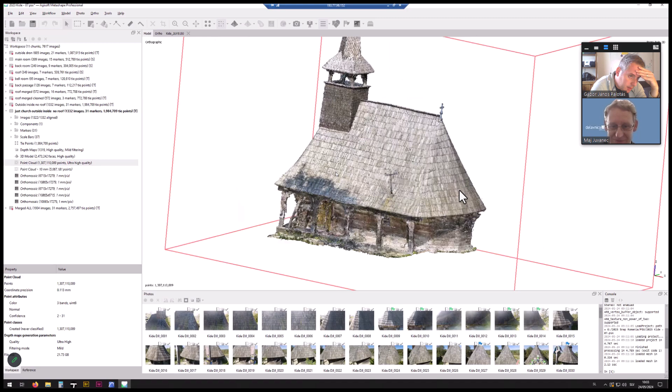Well, we can maybe discuss the survey part, talk about the general things, and then show what we exactly did with this building. So I think it would make sense to show that it's quite understandable from here - you had an outside drone, it's quite straightforward to understand what it is. We have a main room, a back room, a roof, a bell room - these are the chunks, and then some chunks are already merged together.

Let's start with, okay, so first, you upload pictures, in this case like 1000 pictures from the outside. So these are the pictures, you know.

Like I was explaining, I usually take raw pictures because I can then set what is interesting to the photogrammetry. In this case, the roof has to be at the right aperture or the right lighting, the background can be too dark or too light. And here in the bell, you can't see anything inside, but it really doesn't matter because it's too far to be of much use for the photogrammetry.

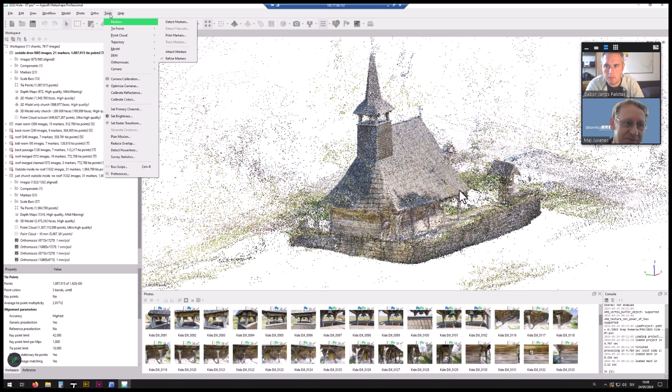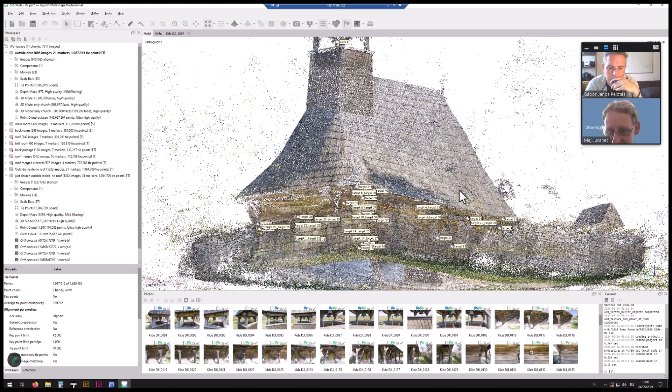So one option is these markers. With detect markers, he calculates and finds these markers on the picture. So if we turn on the markers, the result is he puts the targets - these are these points - on the picture. If we look at the pictures, there are more markers.

What does target mean? Is it the camera target? Like the center line? He recognized this as the target - that's the recognized target, in the middle. So the green ones, here you have the green ones, that means he recognized it and it's visible. These white ones are on the opposite side.

But how do you teach the software to recognize these markers? That's automatic because he knows the shape - this shape tells him the number. That's the number 16. And he puts it in the middle.

Okay, but first you have to give this data to the software, right? Maybe you told this before - sorry, maybe I was lost at the beginning. So the first step is after you have this sparse point cloud, with these tools - markers, detect markers - he does this. He puts these flags on the markers. He recognizes it, and he recognizes it with the number. So before this, it's like that, and the process...

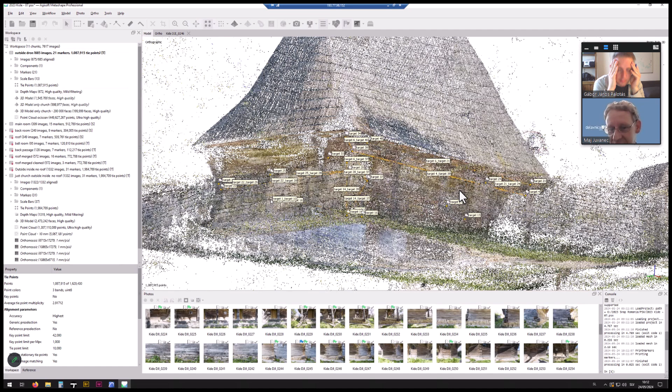Now we have the targets, and when you go back to the sparse point cloud, you have the points, you have the targets on the model. Okay, clear. But you don't have these lines that you see here yet.

This is the calibration process where you put in the hand measures. So there's another thing that was missing there.

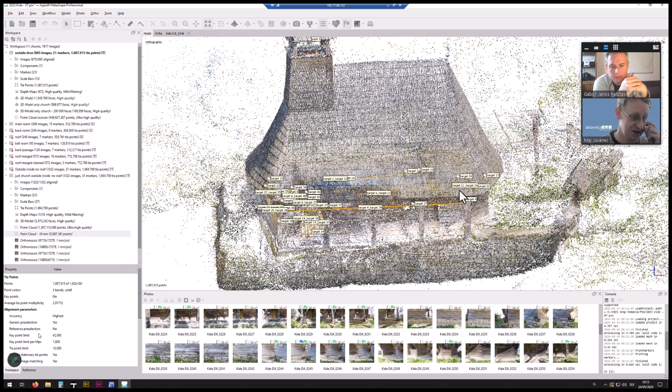This reference - I was telling you, find another button there. So every picture that you have, if it's done with GPS, photo apparatus, or drone, it has coordinates in it. But these coordinates have to be thrown away because they are not accurate enough.

By default, the accuracy in Metashape is set to 10 meters, so that's kind of useful - of course the accuracy in reality is much better. If you don't go with the measurement, actually the results are quite okay. Also, if you have a drone and if it's sunny, you have a lot of satellites visible. Also, non-RTK drone GPS coordinates are relatively okay. But still, for this kind of precision, you have to throw it away.

Because otherwise you cannot manually calibrate the model. So these are the targets that we have.

You see, like 14 is here, the red one. We have the information on how many pictures they are identified in, what's the error in pixels from what he calculated, so how sure he is that the target is on the right spot. If this is a high number, you have to check it manually, why is it off too much. And if it's too much, you just ignore it if you can afford to.

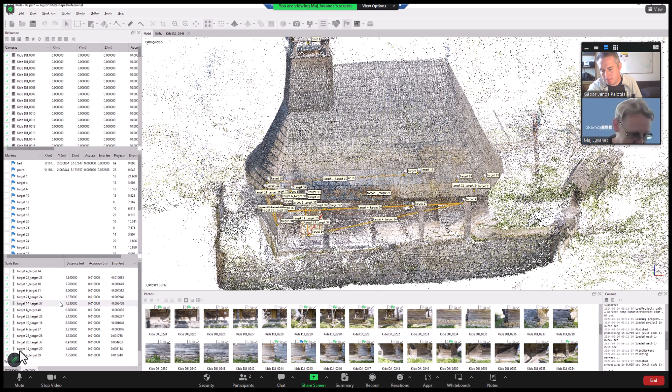So when we have this, we go to calibrate the model. Here is the update transform. At that time, that could actually be interesting to see - he adjusts the size of the building according to the measurement we put in.

So when we put the update here, we actually get these error numbers out. They are not here before, because then he calculates what we input versus what he calculates. And of course, if the number is higher, it means if I mistyped - like if it's actually 7 meters and I put 75 centimeters, which can happen - then I can see there is a huge error, and then you go check what's wrong.

So even if we have a measurement that we failed, or there's somehow an error at survey time, we just discard it. I usually know there was something wrong with the measurement after this. And if you have enough measurements, it's not a problem - if something's wrong with this measurement, let's ignore it, because otherwise it makes a mess.

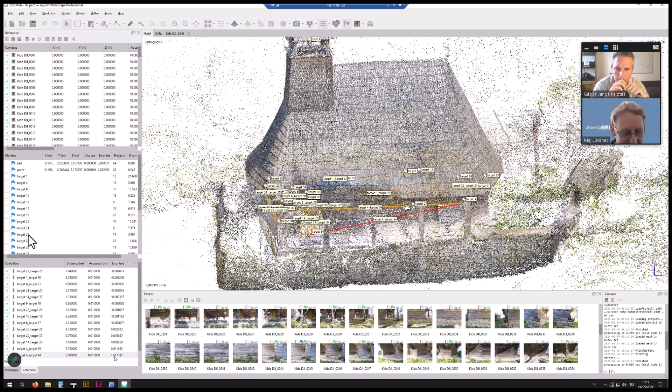I don't know, if you put here like 5 meters - which one did we add, 4 to 36? It's probably wrong at the end, for 1 meter and 6, because we just made it up. But now with the update, I press the update - did you see the picture changed a little bit?

Let's play with it, let's put here some number, I will now add it. Just remind me not to save the model. So we put some different numbers, and now let's take a look at the church, and I'll press the update. It changed the zoom as well.

He slightly distorted the building, calibrated to this number, and that's this calibration, so the model view has a scale. It's not unscaled, but you can see how it changes - yeah, you can see it visually.

So for the first step, when you first put the numbers, it gets a big scaling - so I know it's like 10 meters from here to here, not 10 centimeters. But then when you populate the scale bars, it's just adjusted to relative precision. And of course it's more precise when we have these measurements, unlike on the rooftop where we don't have this control stuff. So you always use this update transform button - there's no other button, just this one.

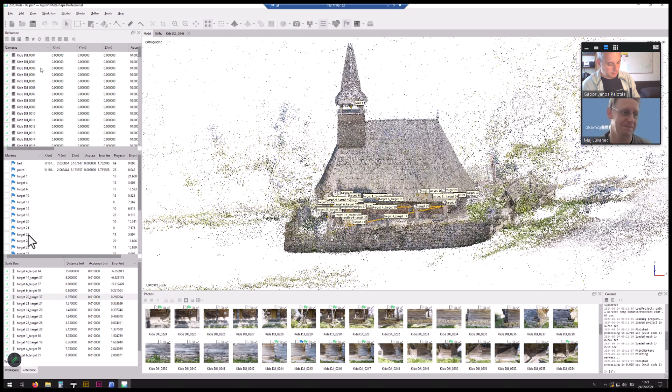When we have this, we move to the dense point cloud, to the next processing in the workflow. So now we've done aligned photos, and we actually calibrated them with the help of the targets.

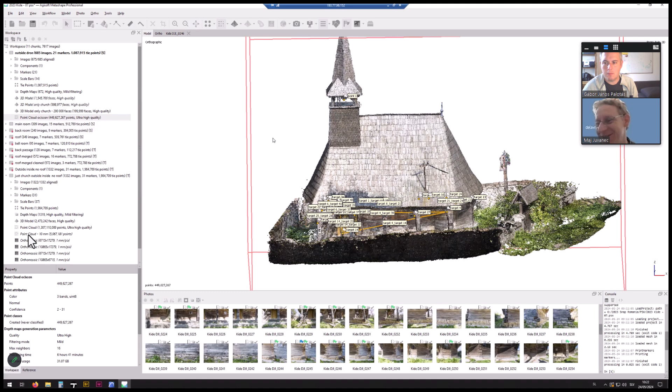Then we go to the point cloud - there is a Slovenian word 'očiščen', that means cleaned up. Then there's a lot of work. You see this point here, it's of course false, it should not be here.

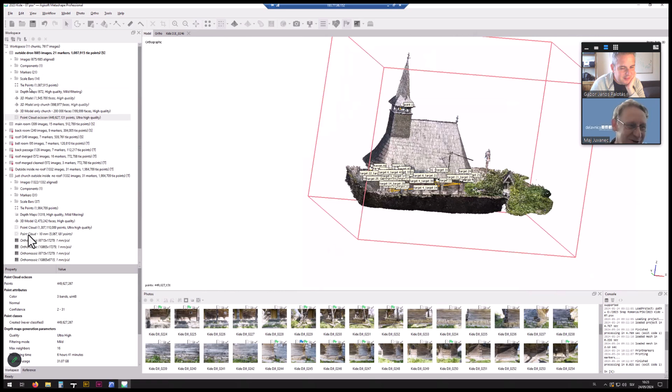It's an error point. So you have to get rid of all these points that are not useful, and as well everything from the surrounding. So if you compare, I threw all these points away in this step.

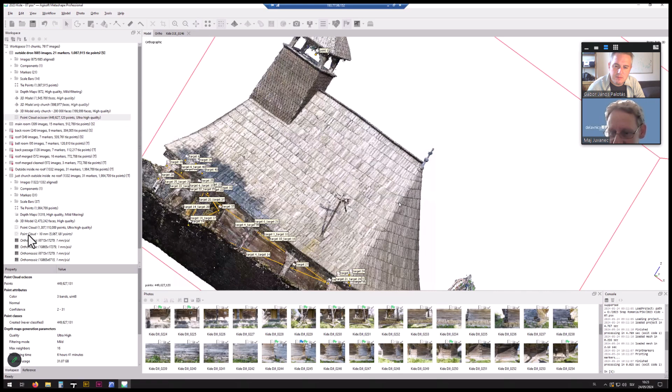Some are simple to do. Then when you go to the details, you can do this time and time again, and you can always find a point that's flying, nothing to do here. Some are simple to identify, but then when you get to more, it's harder to work with some other details. Then of course you can just work with some section, and how precise you are in this step, it takes a little to a lot of time.

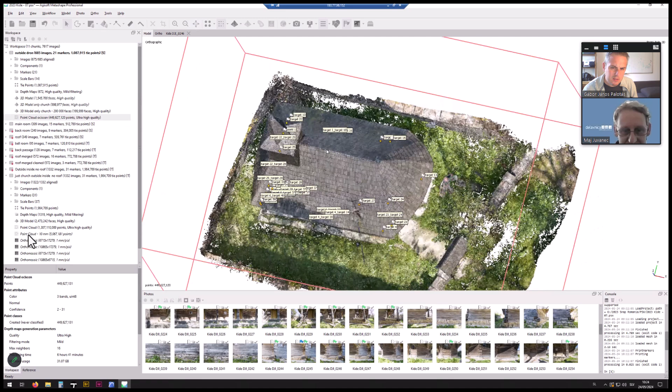So this is the dense point cloud, right? Yeah, already the dense point cloud. Because from now on we usually work from the dense point cloud, so it doesn't make much sense to clean up and work a lot with the sparse point cloud. We work here to get the geometry right, but most of this noise can stay here.

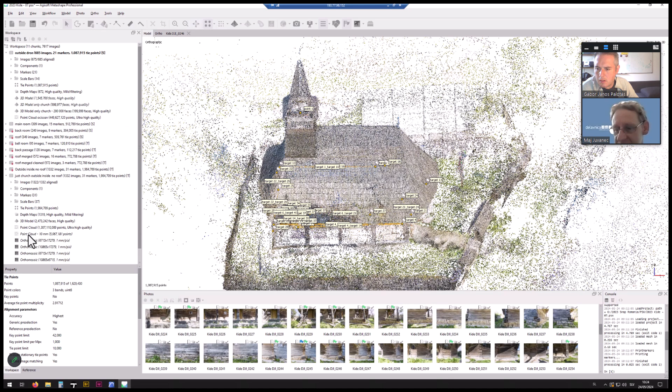Another thing - I said at the beginning let's do this with as much information as we can. When we calculate, there's an option we always put on that says calculate confidence. So this confidence is the software calculating how sure it is that some point is at the right location.

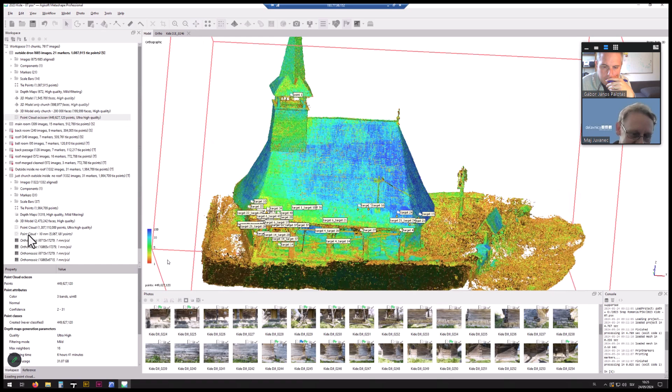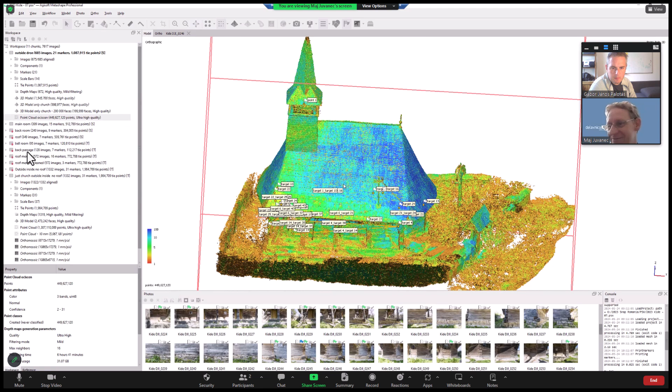So here we have the scale bar. 1 is less confident, 100 is almost completely sure that this is the correct location. And of course, this depends on how many pictures some point can be seen in. So the roof is relatively simple, and it's quite sure that the roof is there. You see there are no more red points here because I have cleaned up - I actually threw the bad points away.

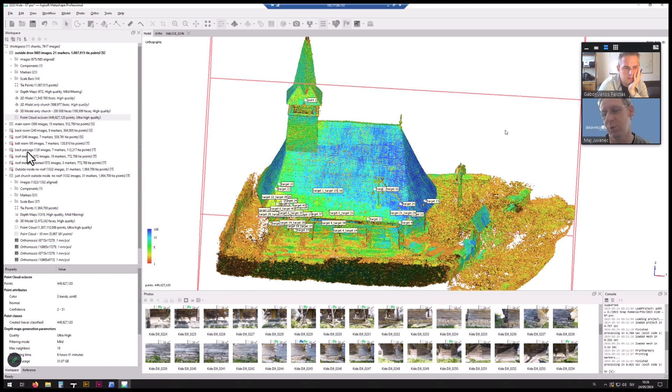So not at the beginning, but rather at this step. Here we start cleaning, but not throwing away every second point - because anyhow, you see there's a lot of points, too many points for working afterwards. But we are throwing them away the smart way, so the points that have lower accuracy are thrown away.

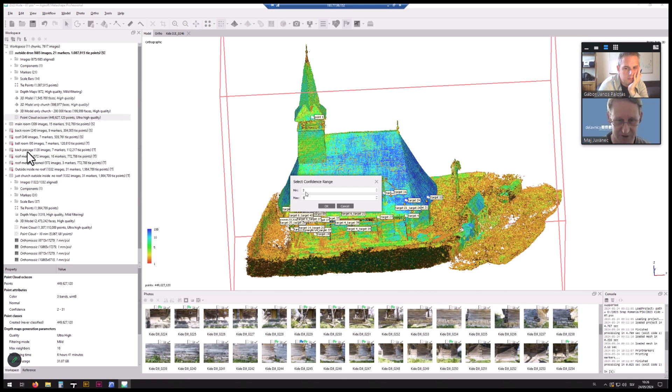And of course, I can select, filter by confidence. I've thrown number one away, so we can see the really bad ones - the next, between 2 and 5 error, we'll see. So these are the points that the computer is less sure are really good.

So if you have a lot of points, we can decide, okay, let's throw all these points away. It always takes some time to calculate how many points are selected, I don't know why is that. So at some point now we have 500 millions - he will update and we'll see how many points we have selected, and we'll throw them away.

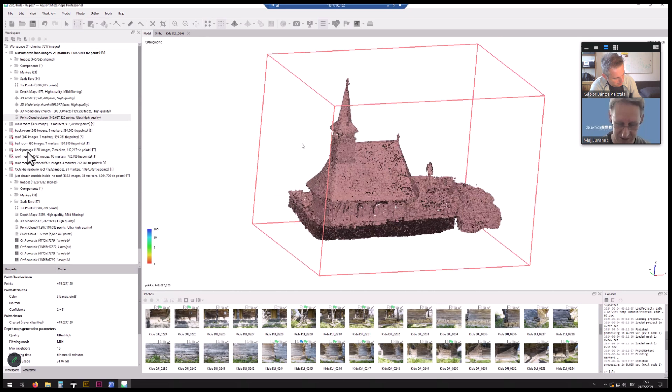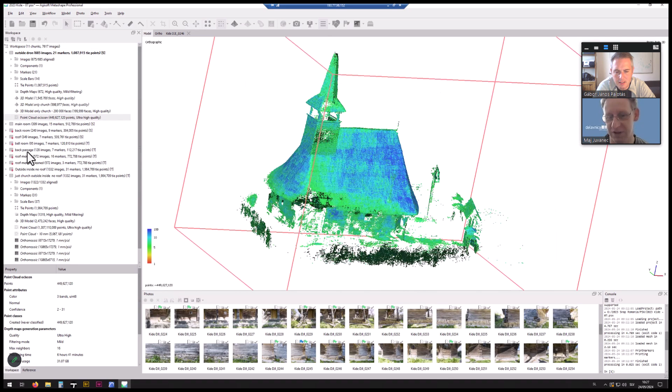I have thrown too much points away now. I usually just throw the level 1 away. You see, I've thrown too much points away. These are now only the ones that are relatively quite sure. But of course, now you see the roof is okay because we have good lighting and a lot of pictures overlapping. We have fewer pictures from the bottom side.

We still don't know how many points it's asking to calculate. Of course we can see the elevation here, that's just the color, what's up and what's down.

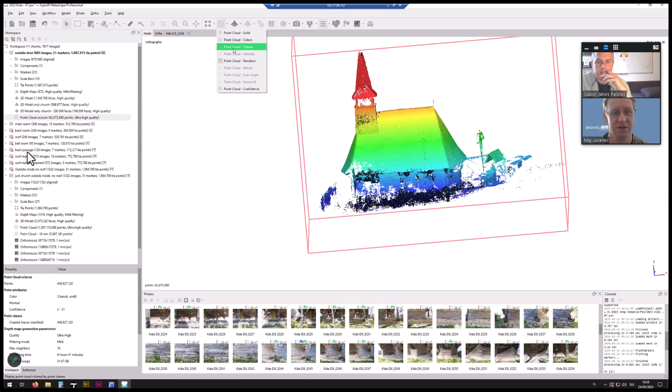Doesn't really matter. What we could do, but usually don't need to, is classes. So up to some point he can classify this automatically, so he knows what is greenery, what are big trees, what are small trees, what electrical poles are. He can separate some stuff, which is then easier to work with.

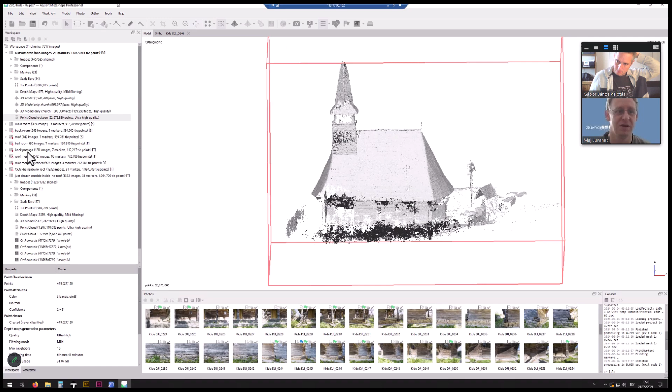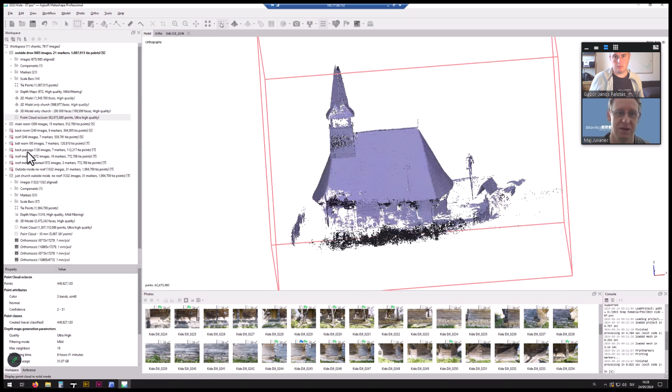But again, it's not that important for what we do. We could classify it to set, okay, all these points will be called 'the bell,' and then we can work with it, turn it off or on however. But I'm just showing you it's not that useful for what we are doing. That is more or less that.

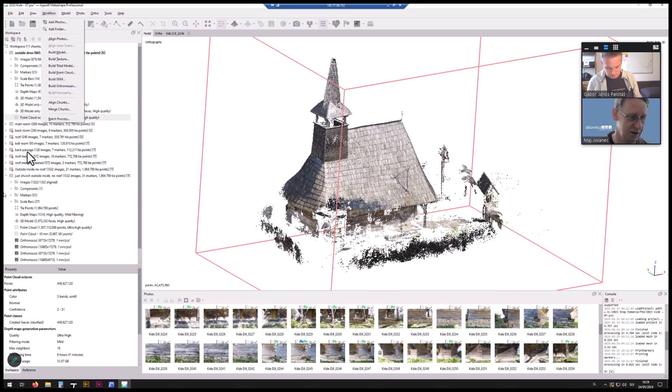But from now on we can go to the next step. We can build orthomosaics. These are the pictures we'll go at.

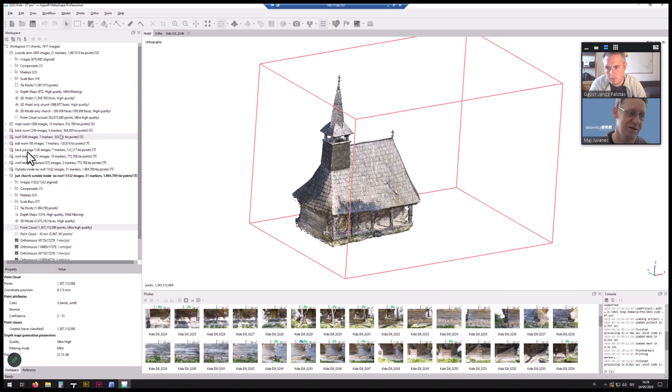Okay, I have now switched to the chunks that are already joined. We work this for every chunk, for every chunk separate, all these steps have to be done. Let's go, before we go there let's see the chunks, so we'll kind of disable everything.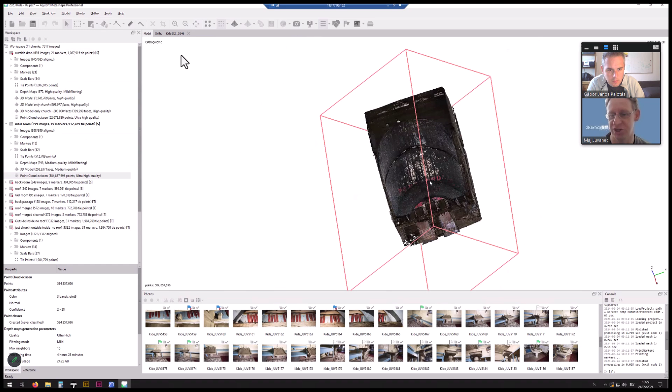Okay, let's see the main room, so that's one chunk, the main room. Then we have the next chunk, let's say the back room. We have 10 more minutes before... okay, then we just reconnect.

Okay, you see this button here at the right, this one shows all chunks that are aligned, and these two chunks are already aligned. So the back room fits perfectly where it should be. Let's disable this one, it will be easier to see here.

And if we put on the targets again and the measurements, you know target 38, target 3, and target 19 are as well, or probably this one - these are the three targets that are the same on this chunk and on the chunk of the main room.

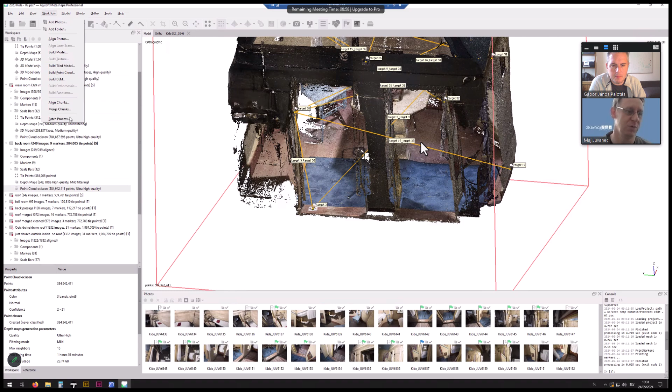So when you go to workflow, align chunks, you select, okay, now we have the main room and the back room, please align them, and you just mark it, okay, based on that point base. It will calculate and it takes a lot of time, it's not that good. So marker base means he will just add it together - if you have 3 points non-planar, he can add it together.

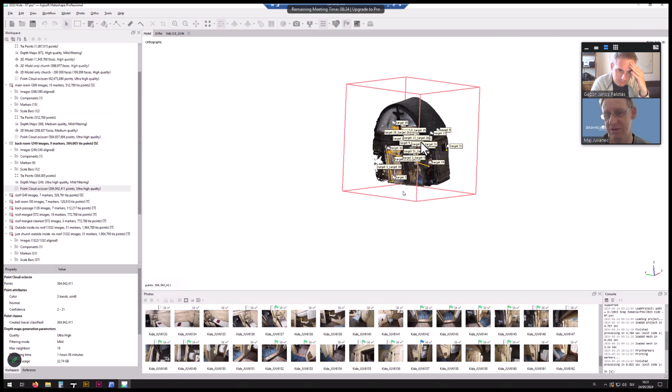And so all the chunks are now aligned in this way. So now you just... no sorry, the chunk and the outside drone as well. But we've kind of erased a lot of data from the outside chunk. I assume if you align them in a good way, it doesn't make too much sense to merge the chunks, right? Because you always have the option to switch off some parts and use some of them only.

You are right, however the only difference is - I don't know why - if we try to manipulate, like to make a cross section, he just selected the active chunk. I cannot make a section of a building if I have more chunks because he doesn't know how to do it. So when you merge chunks, you keep the originals as well.

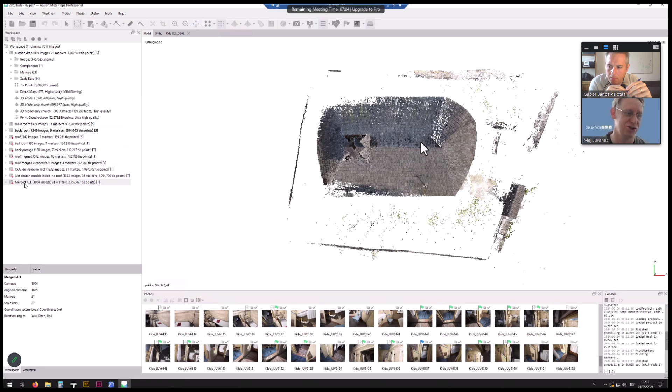Yeah, I keep the originals, and then you have like roof merged and roof merged cleaned. I usually add it, so this chunk has everything merged, and then we have just outside and no roof, because I don't know, the roof is not that good or that interesting here. So we are talking about the attic, not the roof.

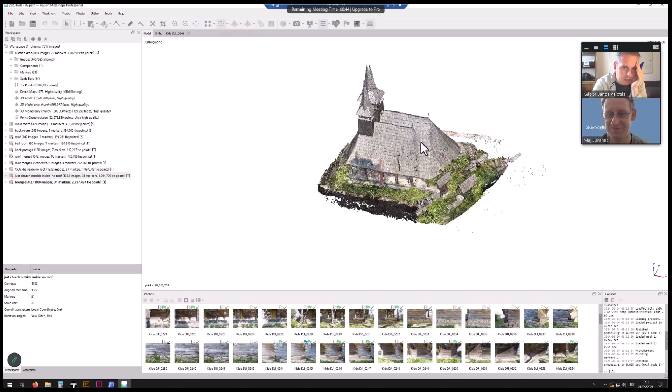What we can see on the screen, is it the scaling that you made? Yeah, it's quite visible now. We were playing with the numbers, and that has happened. The chunk we were scaling is now false.

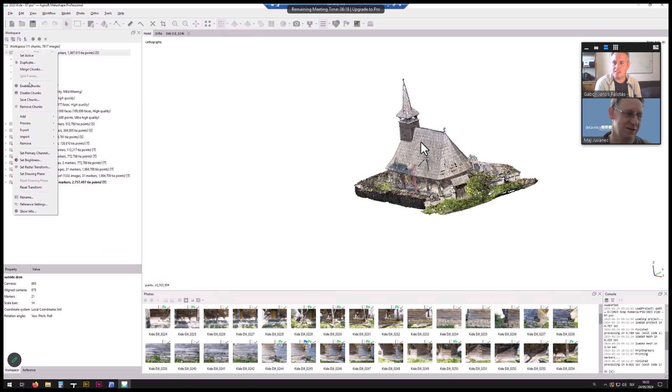That's the outside drone, right? So this one is false. Now everything is all right. Okay, and after that we go to the other option.

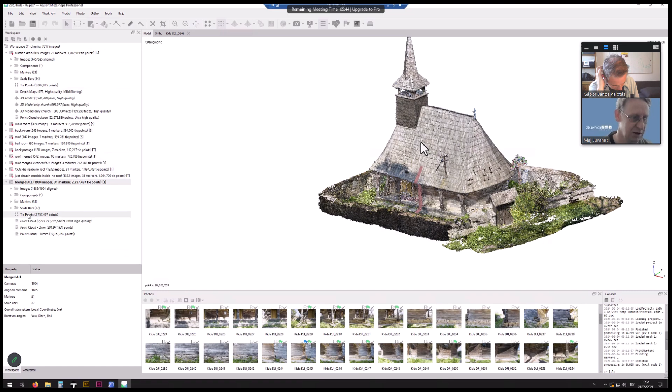So it's the model, that's the 3D model. Let's switch now off all this, let's model, let's just so I don't have so much. Okay, the most useful will be this one, let's work with this chunk now.

So we have the sparse model, then the point cloud, which is the ultra high quality. This one has about 2,200,000,000 points, and I've downsampled it to 10 million points. That means every 10 millimeters there is 1 point. You can see it's still more than enough.

To work, but it's not done by just throwing away every second point. The points are created to maintain the same density, about 10 millimeters, so every 10 millimeters there's 1 point.

The next step, of course, is the 3D model.

I have a call, can I take it? I don't know the number. Sorry, yeah, hello.

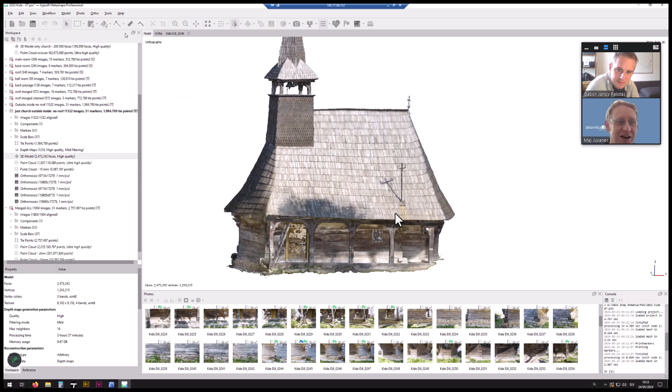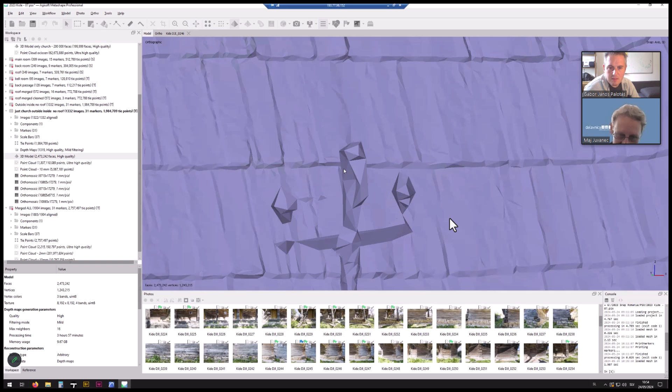Next step, mesh. So we created a mesh, that's the mesh with the triangles that are colored. So shaded or solid, you see the triangles that are created from this point cloud, with the solids, or actually the faces. It's kind of even harder to work with than the points.

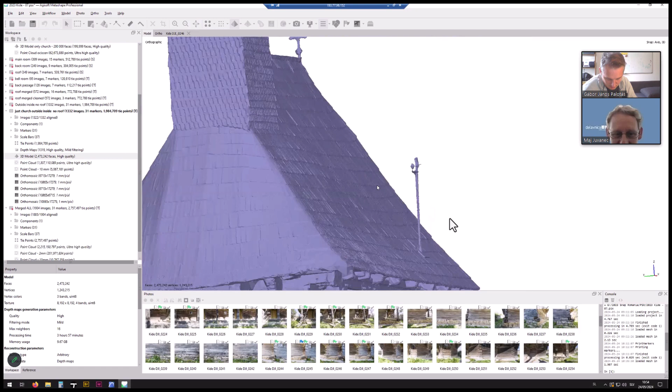Of course you can delete like this, but it's kind of hard to fix the solids, the faces. But usually they're good enough to work with. So these are the solid, these are the shaded ones where the colors are calculated, and then the most useful is of course the textured one.

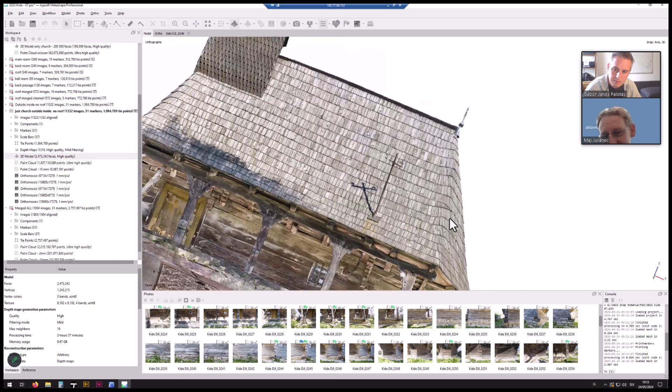So when you build a texture, it's another process. All these textures are made and they are glued to the model, and this kind of works nice. What is the correct order? So do you create the model first and then the texture? And when you create the texture, do you need to recreate the model? No, just glue it and it's working really nice.

Okay, here on this side you see it's not that good, I don't know why, but normally it's relatively nice, and it kind of hides a lot of errors in the model as well with the textures. So there is not much manipulation needed at this phase anymore. When you build a texture and if the model is cleaned up and well prepared at the beginning, these steps work relatively nicely.

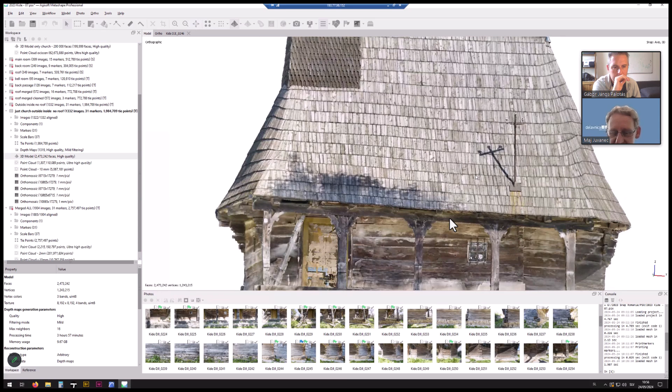Okay, looks like here. Of course there are dilemmas, like the doors. Should the doors be open? Should they be closed? They will open at some point and close at some other point.

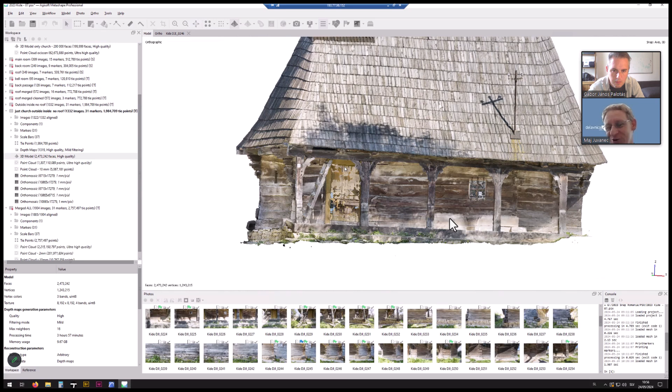I sometimes have them as a separate chunk. I sometimes do a separate chunk with closed doors, so that when we mark the outside, I just turn on the closed doors chunk and it stops the view from the inside.

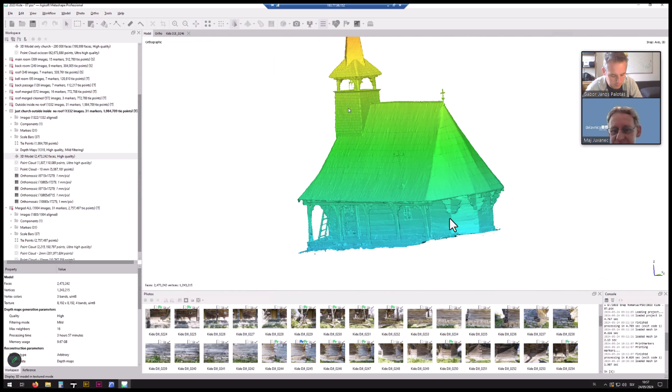And of course, what you can do is, you have elevations and stuff, the colors that are really not that useful, but that's the most useful end product to work with.

That must, so in the step at the beginning, when the software calculates, because we didn't calculate it here, okay sorry, let's finish with this one, with this until the end. We will go back to some steps.

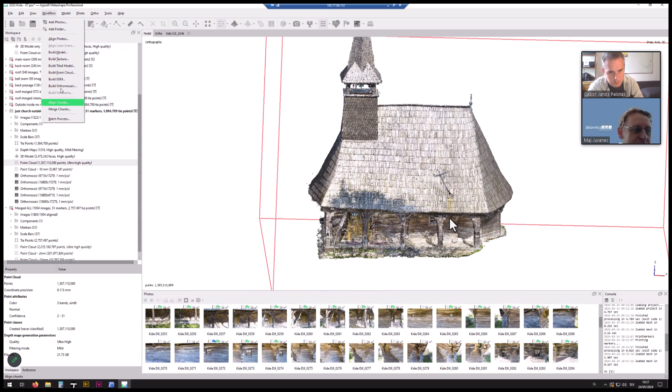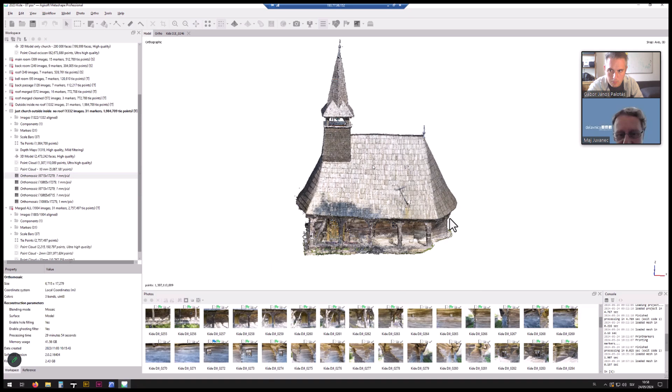The next work for you: then you can build separately a digital elevation model, which is not really useful for buildings, but it's useful for landscape, for classical topography. And the orthophoto mosaics are the ortho views of the building.

It usually takes the model and creates the mosaics from it. I usually set the resolution so that 1 pixel is like 1 mm, because then it's easy to know the correct size when you import it into any other software.

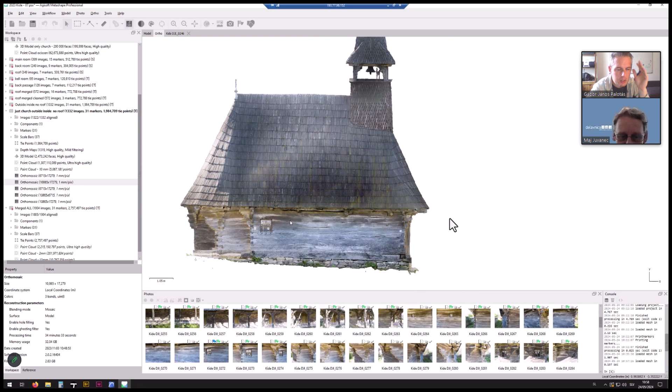And how do you set the direction of the orthomosaic? Is it automatic? No, well, yeah, that's also one. When you start doing the model, you have to align it.

No sorry, you see, I can turn around the building. Here you have move region and move object. So move object, scale object, rotate object - these are the options. I'm rotating now, I shouldn't be doing that. I usually have to set the objects to the correct location, that is straightforward.

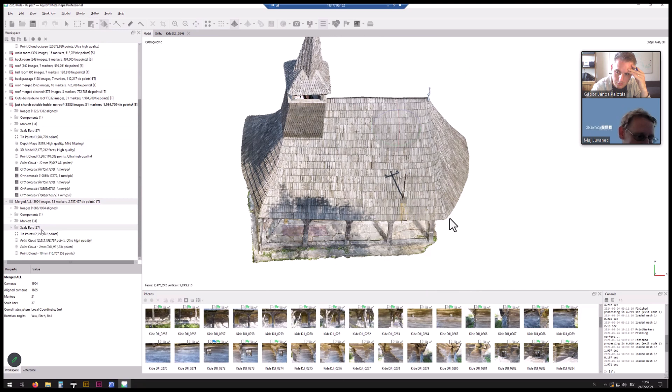I don't know why this cannot be done automatically. It has to be done manually. Let's go back to the, no, this one doesn't have it. Okay, let's go to this chunk.

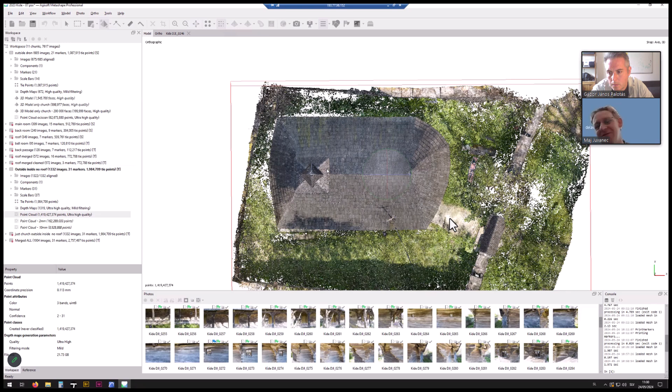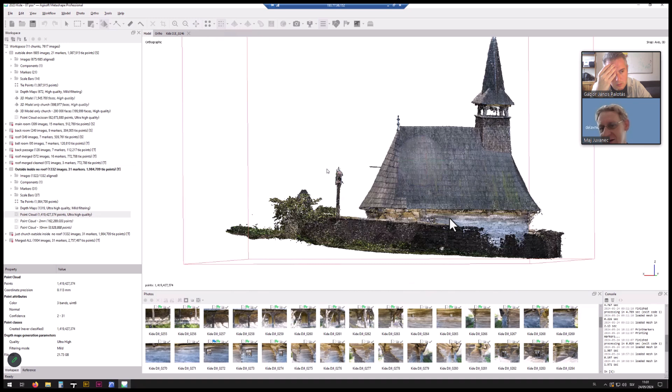So this is now straight. And so I said, okay, let's make an orthophoto view from this view, like it said here.

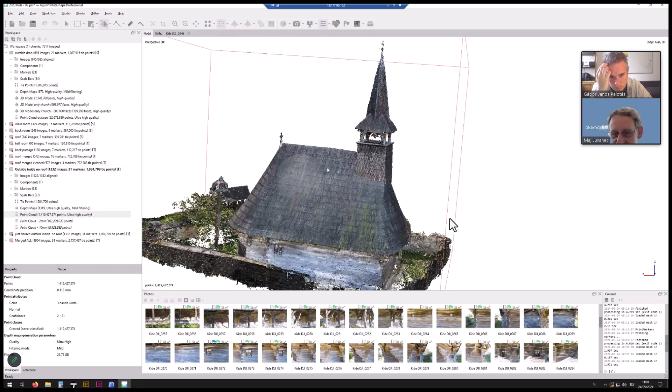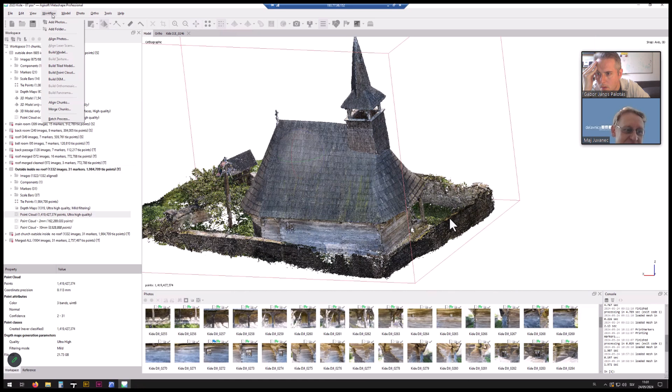Okay, and that's more or less the process of making, manipulating it. I would like to show you some other stuff.

So when you create the orthomosaic, you use workflow and build orthomosaic, or what? Yes. And then, oh, you don't have any option to draw a line to which it will be perpendicular, I mean the view.

Okay, that's the settings for building the orthomosaic. So you put the view, the planar, and then you have the, okay, you can use the current view like we said, or these are the front, XZ - these are the straight views. That kind of helps you, or if you just do the current view, that's okay.

And then you can select what it will use, like a model or a point cloud for a surface, and this blending mode doesn't really matter. Sometimes if the outcome is bad, you have to recreate it, and you usually have to...

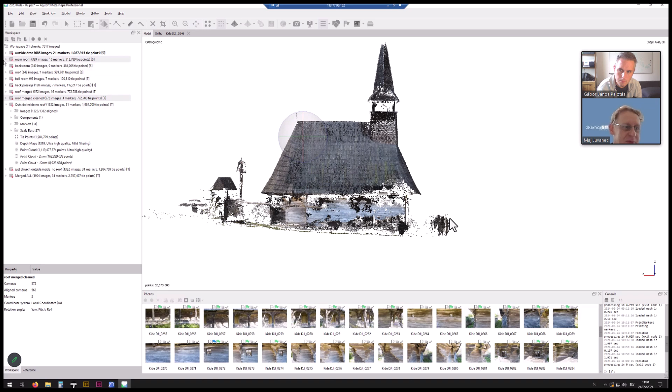Okay, what's another kind of a funny thing? So we are going at the beginning of the process of aligning. What's the logic behind it?

I selected one of these pictures, and it can tell me the matches with the other pictures. So that's these pictures, like the basic one, and that's the other picture, and all these lines are now drawn to join them. Let's take a look at less of them. So this point here is the same as these points on the other picture, and that's the main stuff that is happening in the calculation.

Maybe we didn't select the good pictures to compare now, but this is also what we probably have to include in the handbook - the tie points that are matched from one picture to another. It compares every picture with another picture, and calculates like a lot, like 1,000 points that are okay, and it also knows that 600 are false.

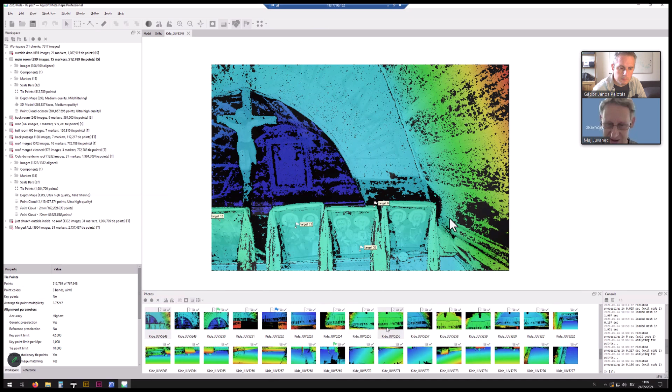That's something that is generally useless, but maybe it's interesting to show a picture of what's happening behind the scenes. So what's close? Well, this beam is close to us, and the rest is in the background. Now, I'm just showing you the graphics - it's kind of there, but you cannot really use it to work with it. It's just shown, but I think the whole calculation is basically done from these pictures.

Not that much from the normal pictures. That's it, okay. I only miss one thing now - I have one question, just on one thing, then it's okay - when you take photographs...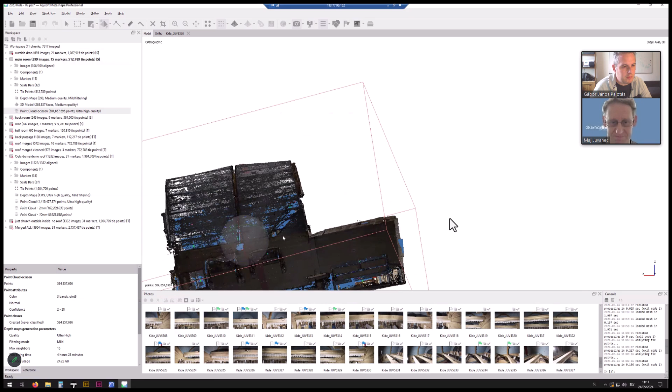What is the ratio - not ratio, the overlapping - between the pictures? What is the percentage like when you make a step? Yeah, yeah, I understand you, but I want to show you, it's kind of the rule inside. Is there a preferred number to it, like 80 percent or 50, or something? In general there has to be at least three, but in practice it has to be more than three pictures to overlap, because...

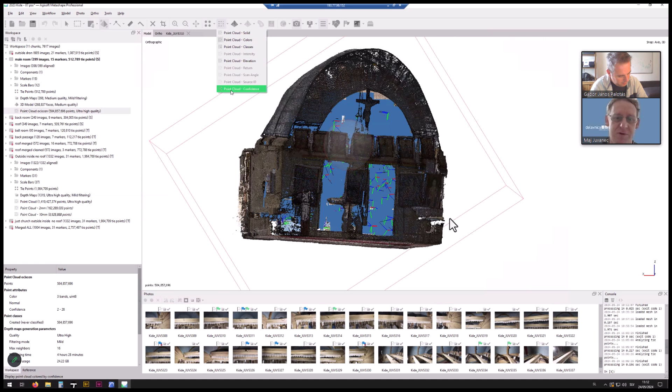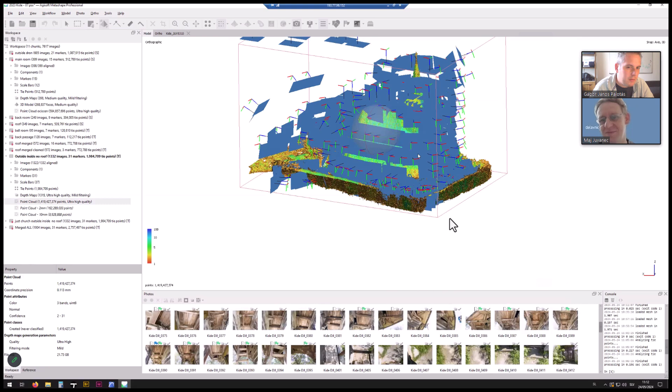You are seeing this confidence. Let's go from the outside - as much overlap as possible is better. So it means to me, I'm bad at mathematics, but it means you need to cover like 2/3 of the previous picture at least. Yeah, yeah, okay, as a rule I would say that, or at least half of the previous picture, but on all four directions, to say - because the rule is that every part needs at least 3 pictures, like horizontally.

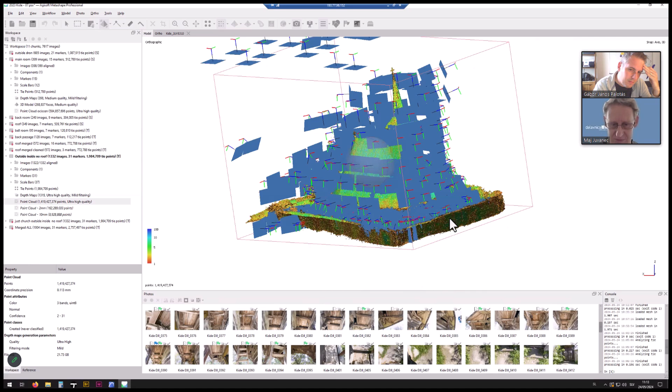These are the pictures taken from the locations for the outside. Of course with the drone pictures the overlapping is usually much higher. But higher overlapping means better accuracy, like you see here.

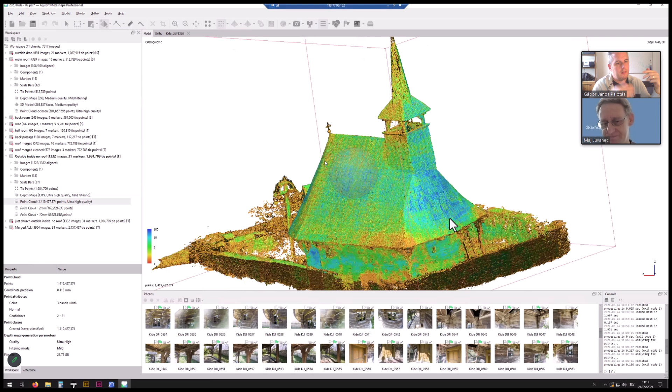Do you keep the same overlap vertically as well, or do you need less vertically? No, it doesn't matter vertically or horizontally, for the software it's the same. It just needs to overlap in all directions, and it's better to have more overlapping.

What you have to be careful about is when you're inside a room with one wall, you have to be careful to take pictures of the edges. Usually you move parallel to the main wall, and then turn maybe 45 degrees to capture the joint of two walls, the edge. That's where the software can combine the two walls. It has to have a good perspective on all joints, as well as with the roof, the floors, and the ceiling.

If you forget that, you have problems reconstructing it, and it takes a lot of time. There are usually some edges or parts of the building that are hard to photograph. So it's not as simple as it seems when just explaining it, but if everything goes fine and it's a simple building, it's a really straightforward process.

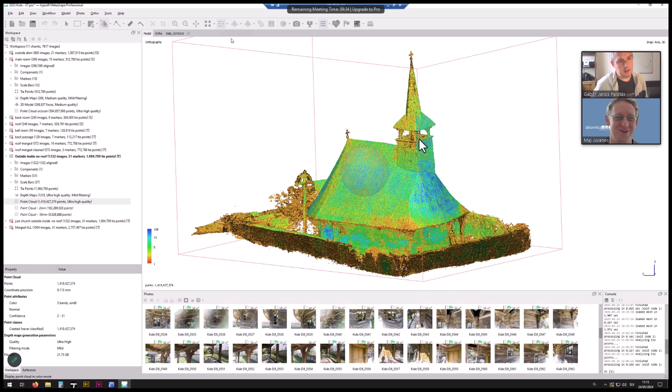Okay. So how shall we continue? Shall I try to write down what we discussed? That's more a question for you maybe. I will try, and then you can correct it. Maybe this is the better option. I tried to explain it, it's a little bit confusing, but maybe you have more distance to this, so it can be easier. I'll try to keep it short.

I think the most useful thing will come through the screenshots you can make inside the software. But in that case, sometimes we'll need to zoom into the correct buttons, because if it's a big screenshot, it's difficult to find the information.

You can just write, I don't know, workflow, align photos, accuracy highest, press OK. Maybe we don't need a screenshot for this box, because the information is just there in the text.

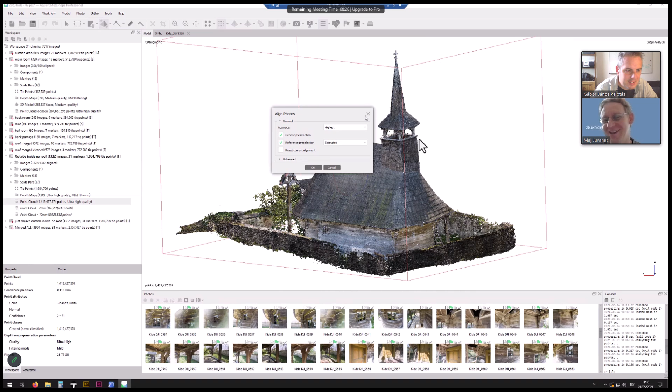What I'm used to is that we make a screenshot and then use a red marker highlighting the important piece of information on the picture. I will do it that way, but it still takes a lot of space. That's not a problem, it's a PDF, and that's useful information, even more useful than all the text. I agree, I like graphics over text.

There's only one more thing, which is actually number four: the description of these surveys. What was the logic behind them? How many chunks did you plan with? What were the difficulties? And what did you have to merge and what didn't you have to merge?

I started writing this already with Elena. I think that could be interesting, just to put the information out there - like, there's 1,400,000,000 points, just to get the impression of what that means.

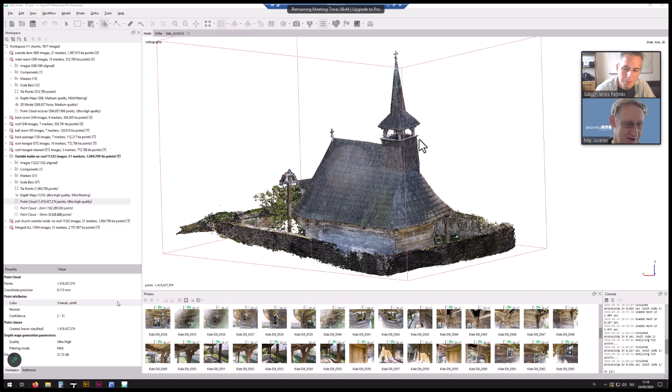It also makes sense to tell in each case how many points you generated first, so the point cloud contained this amount, and then Radu could work with the files. You also provided a lower amount of points, a reduced point cloud. Like what we exactly did, and how many pictures are thrown inside - I think this could be interesting. I agree, all the statistics do make sense.

How the whole project is set up and what it contains. Should I prepare this part, maybe for one object first? Let's see one object first. Yes, that's right, one object, and then we'll discuss it. Okay, that's fine. I'll do this one, maybe for the church. Okay, let's do it like that.

And you will do the other, the preceding Metashape steps, from align photos to build orthomosaics - these basic steps simplified. I think that's the last step. Yeah, I will do this.

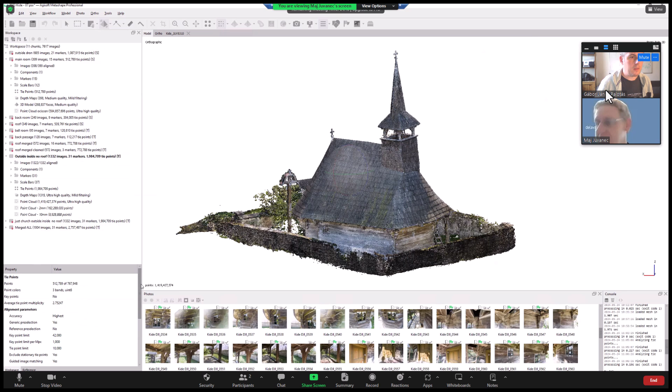Okay, let's check what I can write down from this. Next week I will try this, I will prepare for the KIDE - a short report of what I have to say with numbers and chunks. That's not a lot of work.

But I wanted to do, maybe for the sawmill in Slovenia, try to measure how much electricity we use for the computer, to see if that will be useful. I'm not sure it's useful, but it will be interesting because there's a lot of math going on behind it.

The computer - I explained it. I said okay, you have to do something, and then the computer calculates for 1 hour or 2 hours or 4 hours, and then you have to come back. I said okay, that's great, I will do that at home. That's also useful information.

You can say generating the dense point cloud took 4 hours. Do you have this information? That's the information we actually have - I opened it here, the first process is like here. All the information is kept in the software.

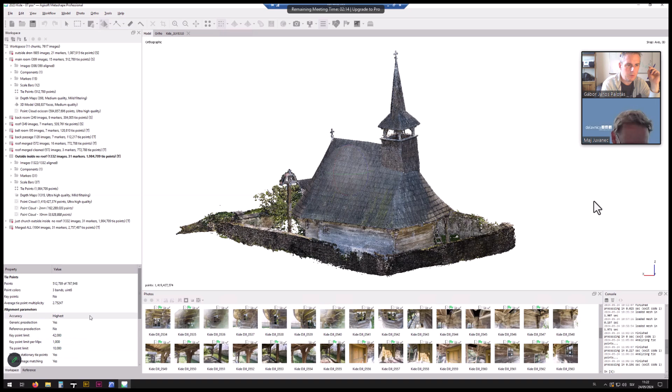10 minutes, running time is 3 minutes, then optimization is 4 seconds. Of course these steps are repeated, and this is just one part, but the smaller the chunk, the faster it goes. So the bigger chunk, I don't know - is it more the processor or the memory that counts? It counts both, usually the processor, but the computer we have, it's not shown.

So I suggest to provide your numbers - you can go, it's like you have the memory. We've already taken some memory out of this computer. The memory has to be enough, but Metashape is not that sensitive about memory. Do you have 128 gigabytes of memory? Oh my gosh, and I took some memory out of it, because it's not enough memory for that.

This is actually a computer for photogrammetry. It has two physical processors with 16 cores. I don't know how much I have, but I think it's maybe 32 - basically just the speed that matters. So this is a brutal machine - well, it's not that brutal, it's kind of old.